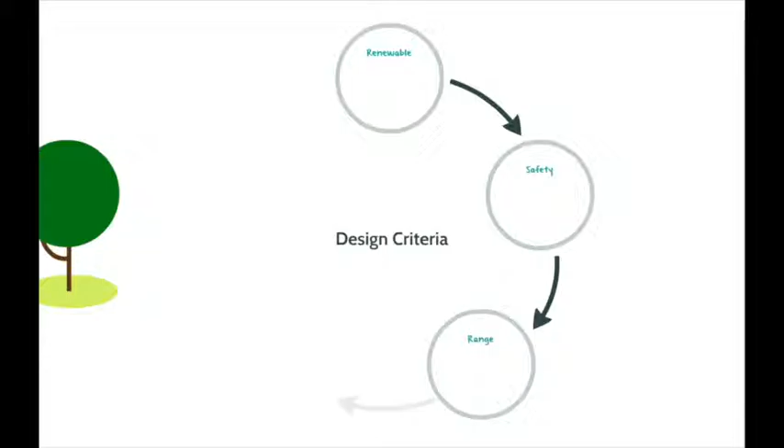To start with, renewable: all the energy used in our system is supposed to be clean and renewable. The second one is safety. We must always ensure the safety of our battery at the worst conditions.

The next one is range. Our design should extend the distance e-cars can cover as far as possible. Following is flexibility: all the functions to improve the driver experience will be accepted by our design criteria. Last but not least is cost and customers. We will try to minimize the expenditure of everyday details in our plan.

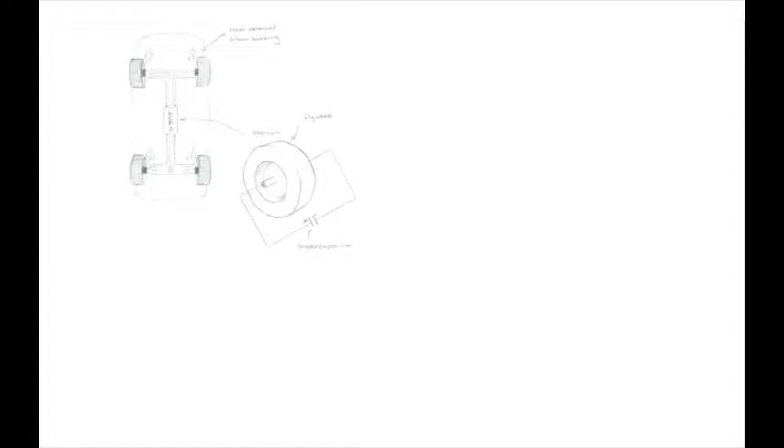The combination of kinetic energy recovery system and hydrogen fuel cell. In our system, we have incorporated the kinetic energy recovery system, KERS, and a supercapacitor which acts like a giant battery, but has much greater lifetime, unaffected by charging or discharging.

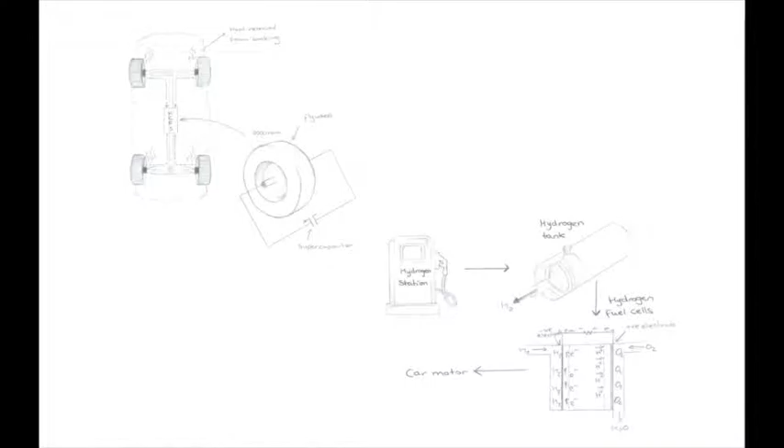A prop shaft feeds motion from the gearbox when the car is traveling to a flywheel, and through a series of clutches and gears, rotation as high as 60,000 RPM can be achieved. The same clutches and gears prevent the motor from slowing the flywheel down when traveling at lower speeds.

The flywheel stores the energy, which then drives a magnet and coil configuration, converting it to electrical energy. This energy can then be used to increase the power of the engine or be stored on the supercapacitor and released slower to increase the range.

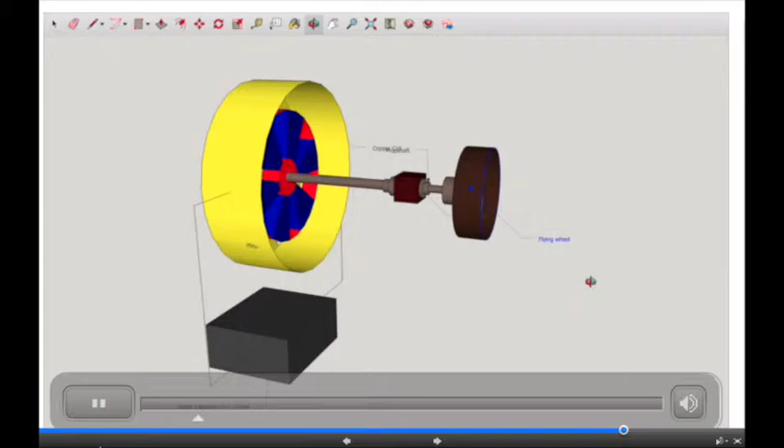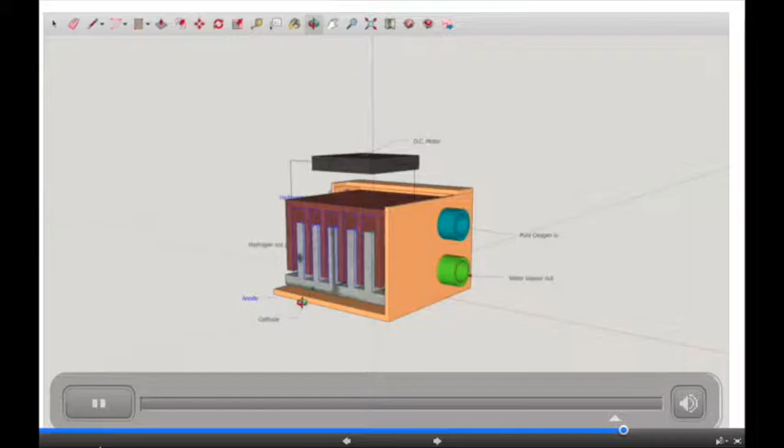On the basics, compressed hydrogen enters the chamber. There are electrodes and catalysts, and the hydrogen atoms are attracted to the oxygen on the other side of the chamber. In the middle, there is a membrane which only lets through protons. The electrons therefore have to travel through the wire and the DC motor to the other side of the chamber, thus creating electrical energy, and the product of all of this is water.

Where our system succeeds is making green cars economically, socially, and environmentally feasible without costing comfort to users. The system works on any car and is a short-term as well as a long-term solution.

Petrol vehicles with KERS will use 25% less fuel, which reduces emissions, and the increased range will make electrical cars more convenient to use, both of which are short-term solutions.

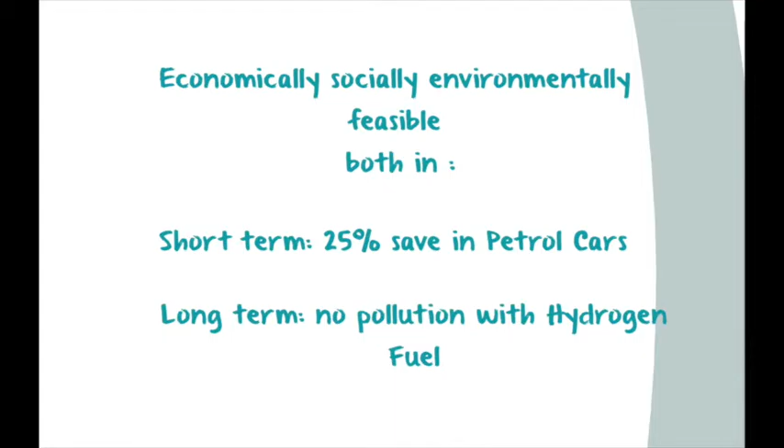In the long term, hydrogen fuel cell cars with KERS will substitute other cars as they are more convenient than petrol cars and greener than electrical cars, as no pollution is created from the source to the end user. As you can see, the combination of the two technologies finally meets all the criteria.